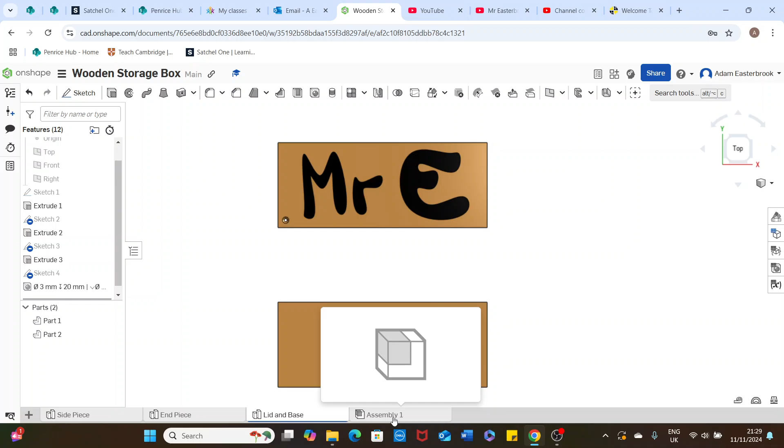So I'm going to use my assembly tab down the bottom here. Click on assembly. It looks quite similar to our part studios, but what you've got here at the top are our mating tools. They're really important in the assembly part because we can start to create parts that move and twist, and enhance how realistic the design is. We can also start to test out designs to see if they work.

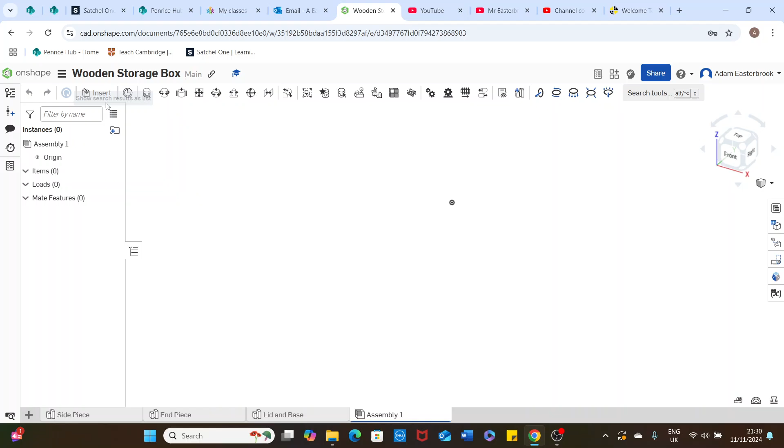Now you'll notice we only made one side piece, so I've clicked on the side piece. I can move it and put it where I want it. For the minute I'm going to put it there. All I'm going to do is go back over here, click on it, and add a second piece. So I've got two parts, because they're exactly the same, they're identical. I only need to make one part, and I could bring two lots of the same part into the assembly studio.

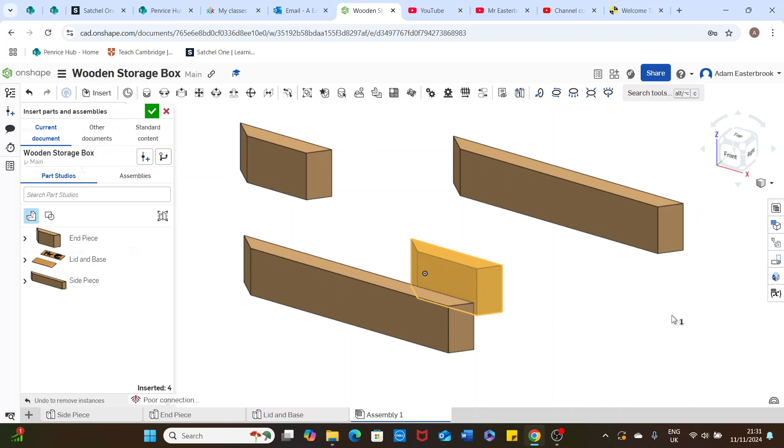I'm going to do the same with the end piece here. I'm going to click on the piece, and bring in a second piece. I'm not going to bring the lid in just yet, or the base, because I want to get this set up first, and having lots of pieces can muddle the screen a little bit and become difficult. So I'm happy with that for a minute. I'm going to green tick it. You'll notice that they're not facing the right way, and that's okay.

We can start to move things around in the assembly tool. So I'm going to hide the origin because I don't want it there, it just annoys me a little bit and I don't need to use it. So this one here needs to be flipped around 180 degrees so that the smaller faces are both facing each other, pointing towards one another. So I'm going to left click on this part.

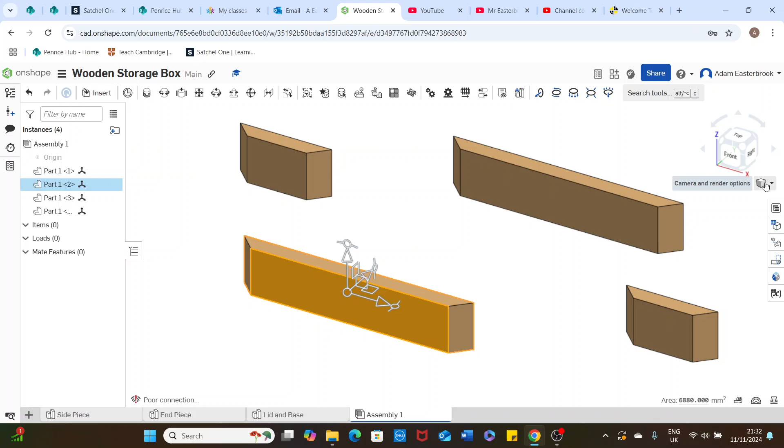And I'm going to use this little tool here to flip it around. You'll see it starts moving, so that we go all the way around to 180 degrees. There we go, they're now facing each other.

I'm going to turn these two round 90 degrees. So I'm going to click there. This time I'm going to use this one here - it kind of points, almost indicates which way we can rotate it. I'll show you the other ways we can rotate it as well. So I'm going to come around this way, 90 degrees. Doesn't make too much difference if it's not bang on 90.

Okay, but you can see here I could flip it that way - I'm not going to. Or I could flip it around that way. So you have these tools here, and I could move it out if I want to. I could move it up a bit more, or move it to the left or right a bit more. I'm going to leave it like that for a minute.

This one here, I want to swing around 90 degrees that way. There we go. So there are my pieces, and they're all facing the right way now.

What we're going to do now is what we've used before - we can use our fasten mate. When you fasten something together, it means you attach it. And I want you to think of this like a little blob of glue, PVA glue, that we're going to use to glue our pieces, our components, together - our side pieces and end pieces together.

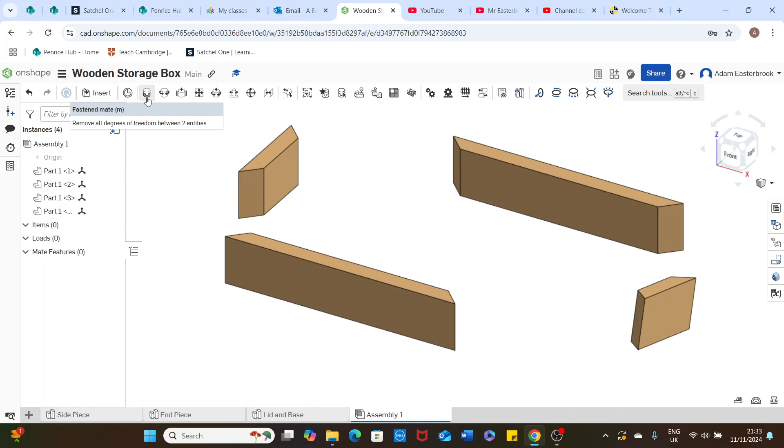So I find the mating tools in Onshape can be fiddly, and you have to really persevere and show some patience. So I'm going to click on my fasten mate, and you need to tell it where you want to glue it together. It usually gives you three options. So here you can see I could choose there, there, or there. Or if I was doing it at the top, I could choose there, there, or there. It usually gives you three options.

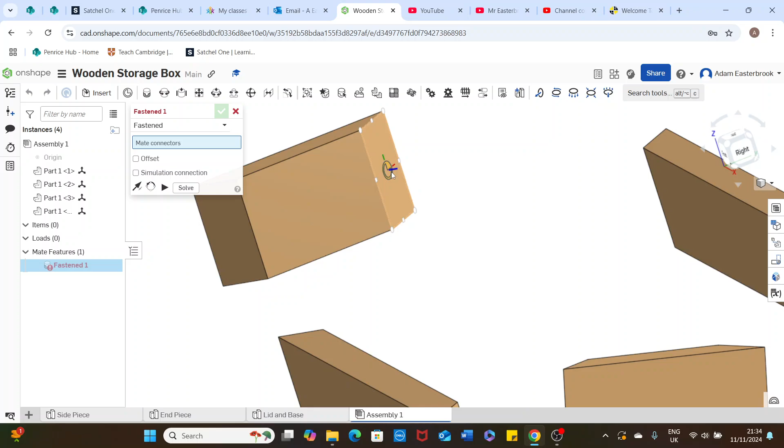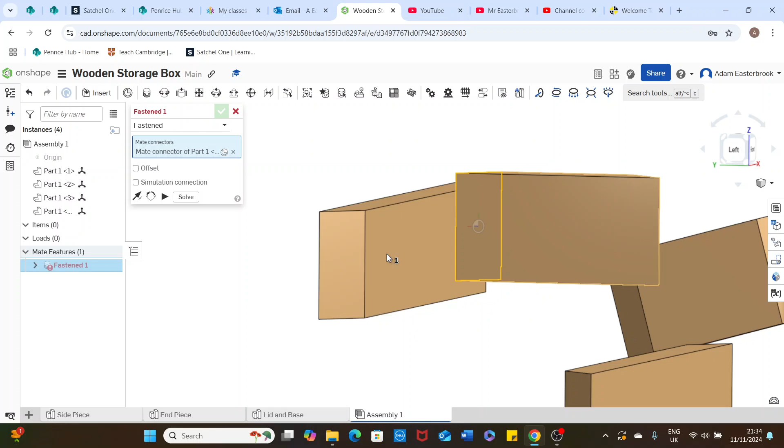Let's choose the centre now. The key for us is having the blue line pointing away from the material. So, blob of glue there. I am orientating myself by holding down the right mouse and orientating my view around. And I want to put a blob of glue - again, I want that blue line pointing away from the material, and I want it in the centre. Those two are now fastened together. Green tick.

There's my first fasten mate done. I'm just going to repeat that process for all 4 of our mitre joints.

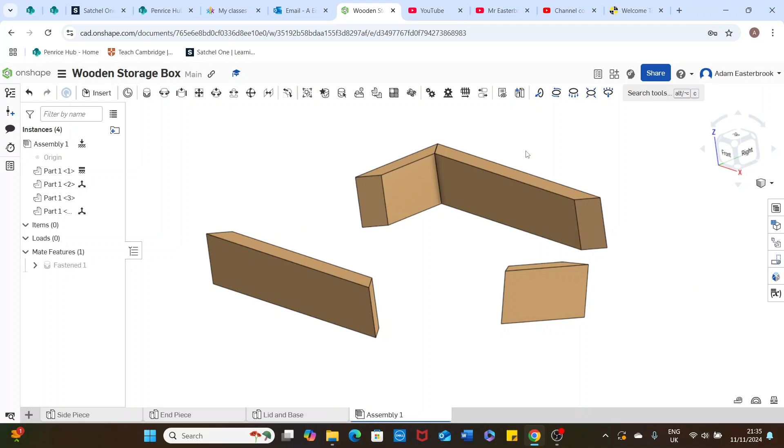Now, what I didn't do before is right click on this and fix it into place, so it won't be able to move. This one I can still slide, but that one is fixed in place.

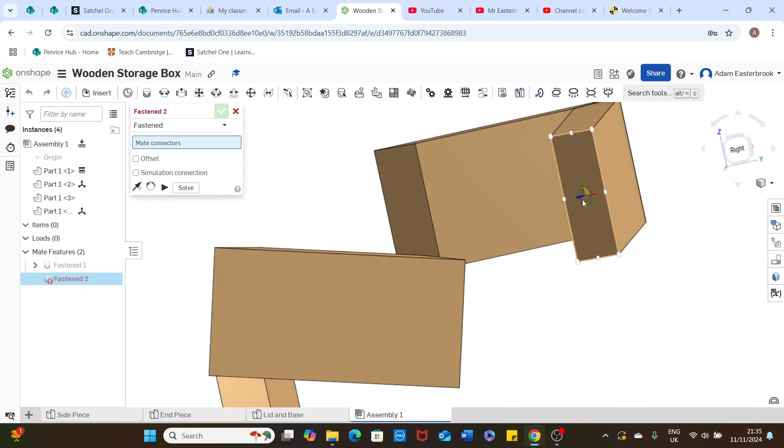Let's go back to our fasten mate. Think of it a bit like glue. I'll zoom in so you can see exactly what I want. That blue line is really important, it's pointing directly away from the piece of material we're clicking on. So I click there, a blob of glue, and I want that blob of glue to line up with the centre of that mitre joint.

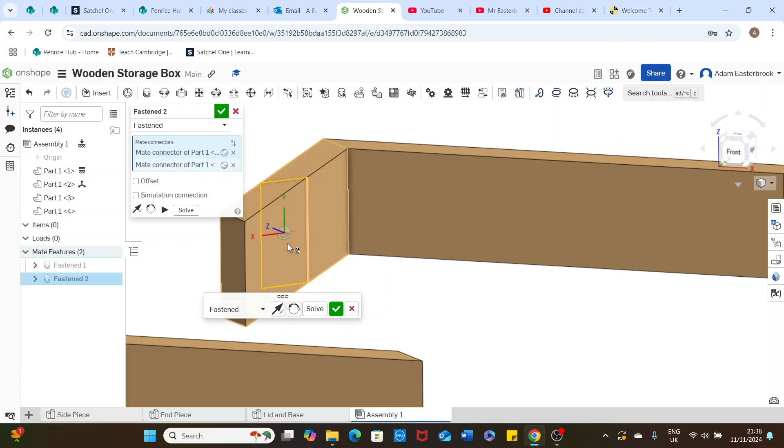Click solve, and for my final mating fasten mate... no, didn't want that. I made a mistake there. Let's undo that, and green tick that one.

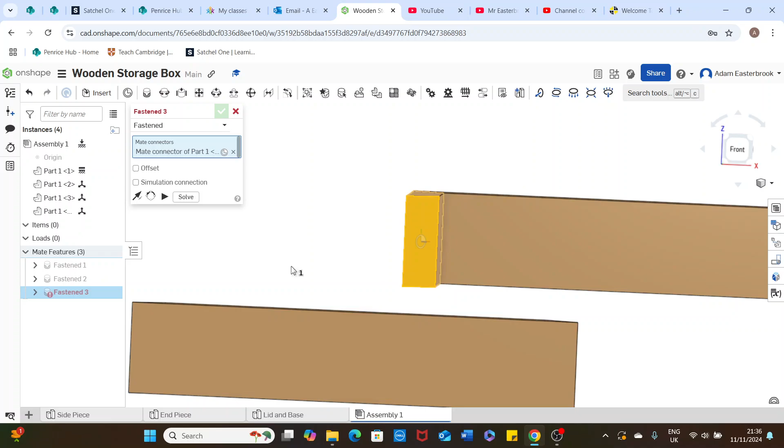Let's go back to my fasten mate. I was trying to do too many fastening mates there. So I want a blob of glue there, and a blob of glue there, bang in the middle, lining up. Green tick, solve.

And there is my box starting to take shape. Let's change my view to isometric. If you ever get a bit lost where you are, always use your navigation cube, click on isometric, and go back to that view.

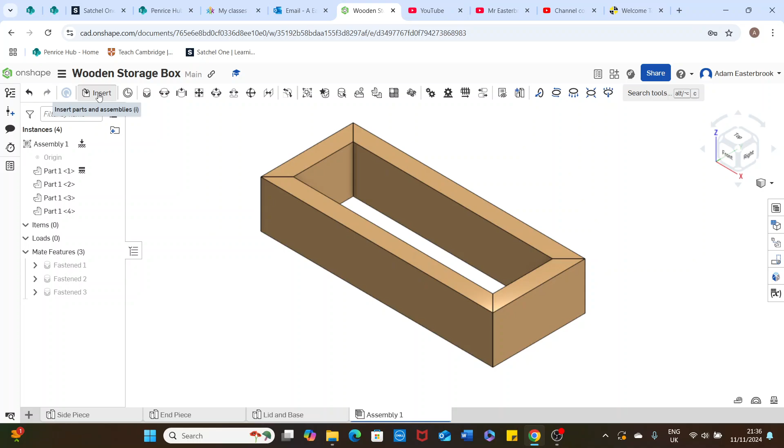So I need to bring in the lid and the base, so I'm going to insert them, overlay, green tick. Let's move my lid and my base off of there, and start with the base first.

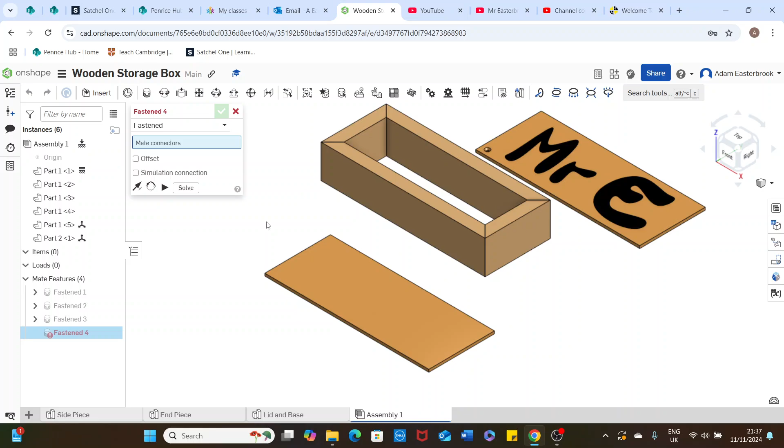I'm going to use my fasten mate and the corner this time. This is where it really can become quite fiddly. That's it, perfect - right in the corner with the blue line pointing directly away from the piece of material I'm clicking on, so a little blob of glue in that corner.

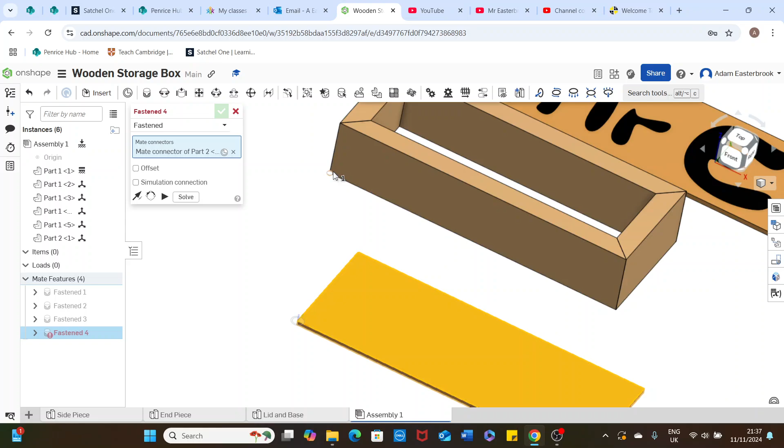I want that to line up with this corner, but on the underside of it, so I'm going to orientate myself around and look up the bottom of my box. I'm going to be really patient - I want that blue line to be pointing away. You can see how tricky it is there.

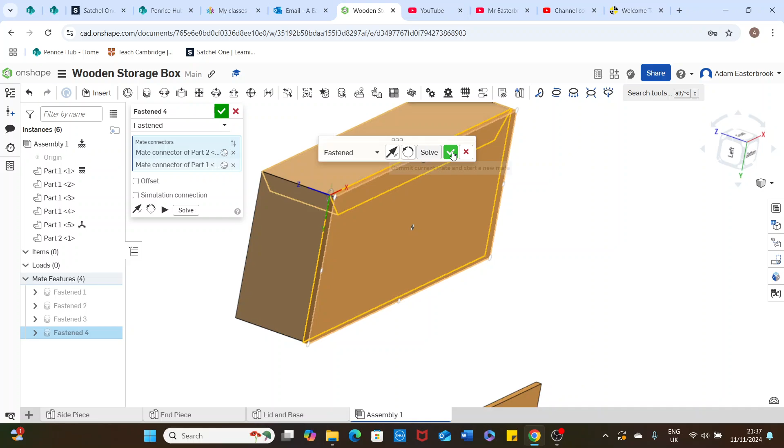I'll scroll out so you can see what's happened. Green tick, solve, green tick. It is quite fiddly, like I said, and you do have to persevere.

Happy with that. Going back to isometric, I've got my base and the size of my box. The last thing for me to do is put the lid on, so I am going to use a...

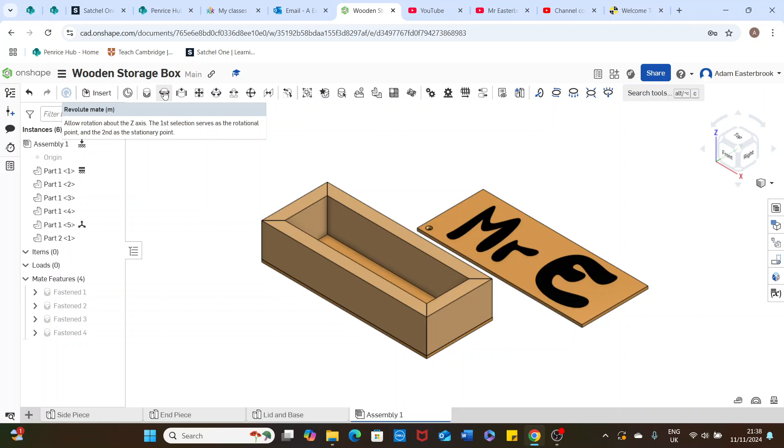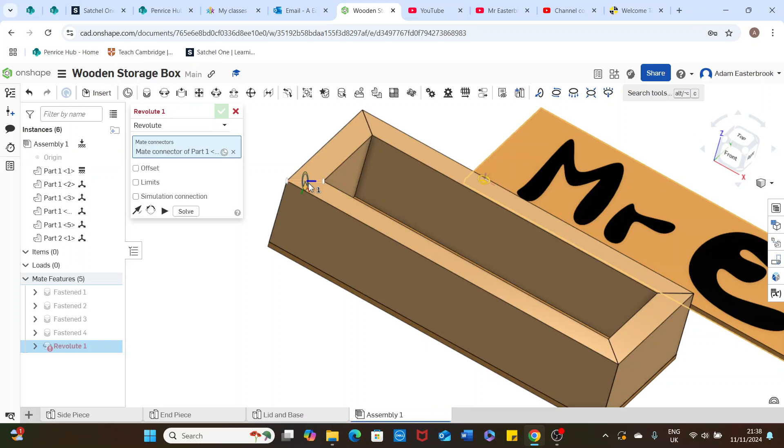Revolute mate - let's see if I can get this right. I want my lid to rotate, just checking, I think it's revolve. I'm going to choose the blue line pointing up from there, and that's going to revolve around. I don't think this is going to work properly - it won't line up. I need to do a fasten first, then a revolve.

Solve, green tick. Doesn't quite look right, and this shows you really how patient, and how accurate is the word I'm looking for, how accurate you have to be with these mating tools.

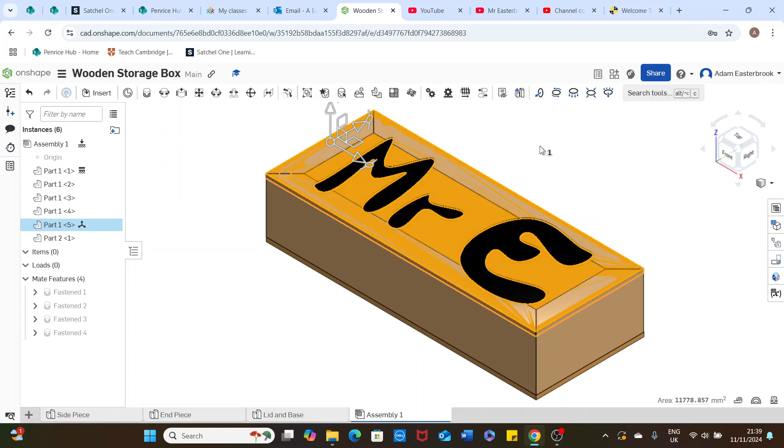So I'm going to just delete that mate, click on my lid, and move it off slightly.

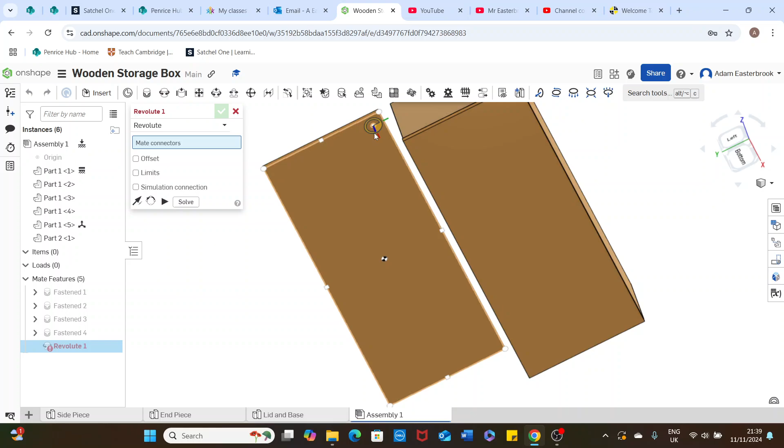What I'm going to do is use my revolute mate. I'm going to go to the underside of this little countersunk hole that I've created. I'm clicking on the bottom there - the blue line is pointing away from that surface, so I want the bottom of that to line up with the top of this piece, where this mitre joint will be. The blue line has to be pointing up right in the middle.

There we go, solve that. There we are, so now I've pretty much finished my box.

If I right click on my Revolute mate, I can click on Animate and change it to single, then press play, and you can see it shows how my box lid will open and close.

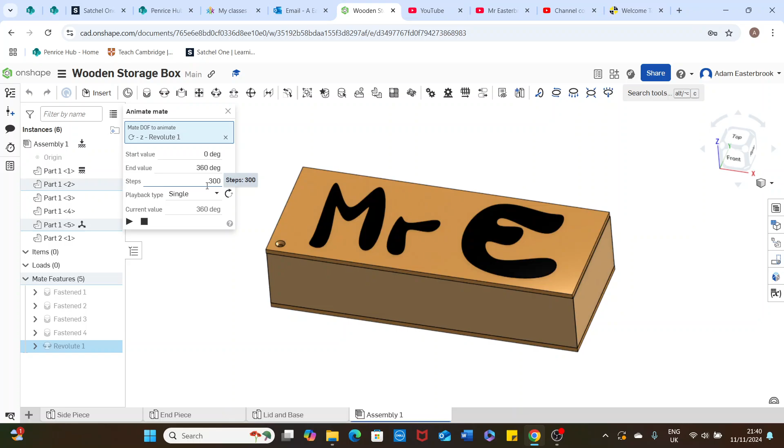If I change the steps to 300 and click it, it goes a bit quicker. I could drop that down to 5 and it would go really stupidly quick. If I knock it up to 1,000, that's going to go really slowly.

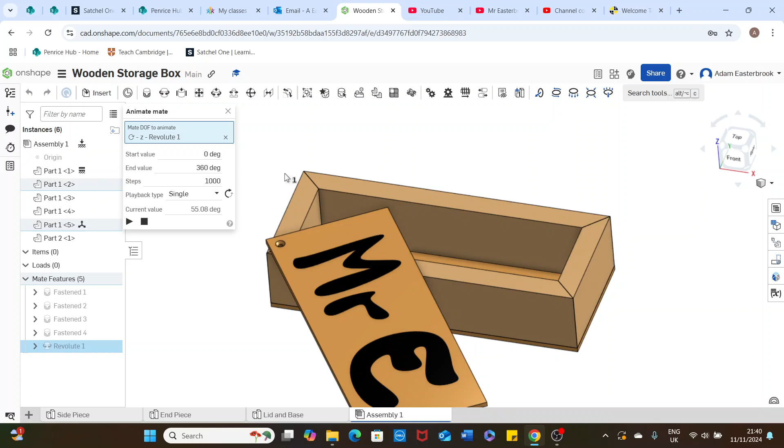But that's our mating tool. We've got the fasten mates, where we're using things to stick together, and I've used a revolute mate so I can rotate my lid to show what it will look like in real life.

That is it. That's hopefully pretty much your box designed in Onshape, our CAD virtual model, to go alongside our initial freehand sketches and our physical making of the box.